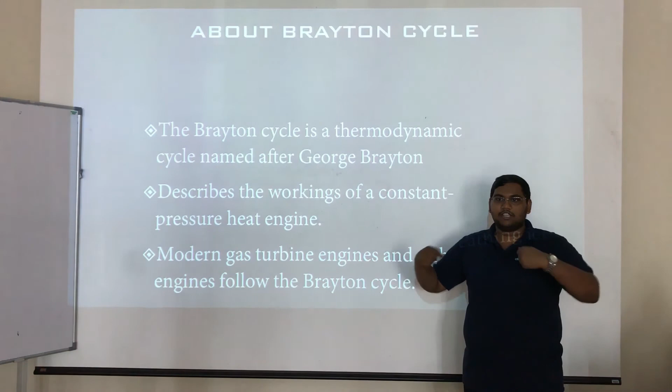So about the Brayton cycle. The Brayton cycle is a thermodynamic cycle named after George Brayton, so the Brayton cycle's name comes after his name. It describes the workings of a constant pressure heat engine, and modern gas turbine engines and air-breathing jet engines follow the Brayton cycle. Air-breathing jet means the air that is being drawn in for the sake of the engine's propulsion.

This solar Brayton cycle seems to be a bit interesting because the heat is absorbed from the sunlight itself, and from there the Brayton cycle can be applied for this application. So this is the Brayton cycle. I'll be touching into the closed Brayton cycle so it's easier for us to understand even more.

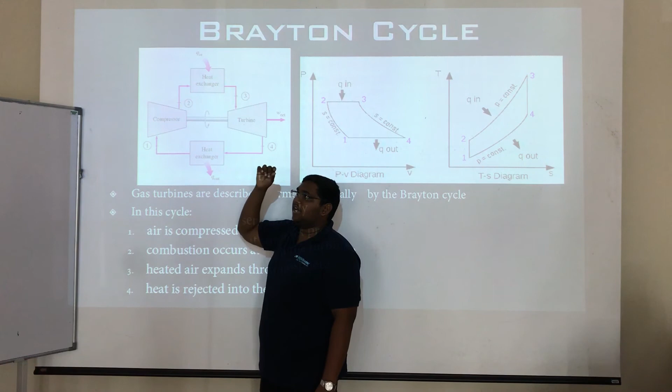So gas turbines are described thermodynamically by the Brayton cycle. In this cycle, what we know is the air is compressed inside a compressor and drawn into the heat exchanger where heat is pumped in, and the whole gas is flowed inside the turbine, and it is drawn into the heat exchanger for heat rejection.

And we can see over here there are two tables, and I will be focusing more on the TS diagram, so it is easier for us to understand even more. So over here we can just see the comparison between the schematic diagram and the TS diagram.

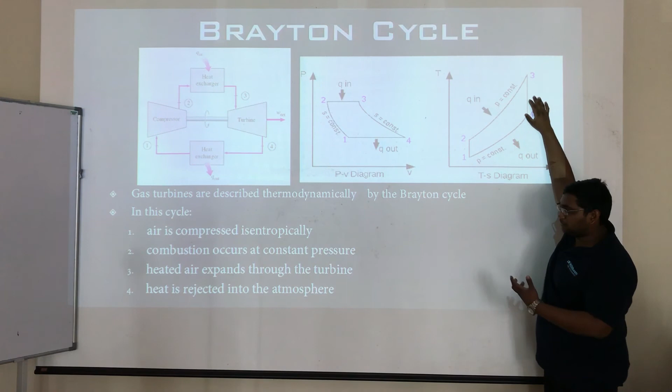So number one seems to be the compressor, where the pressure increases, and it is drawn into the heat exchanger, and combustion occurs at a constant pressure. Over here in this region, in the turbine, the air expands, and heat rejection occurs again.

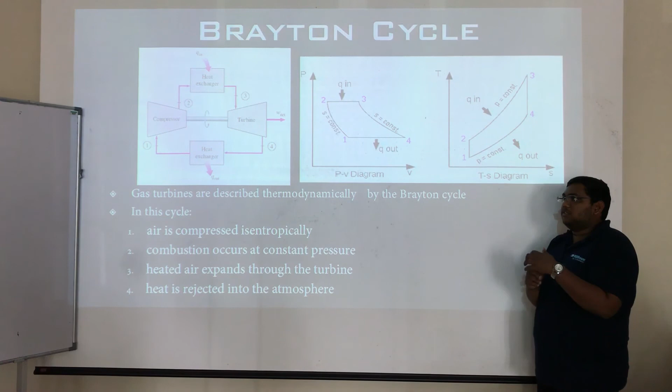And this is considered a continuous cycle, and it is considered to be much more sufficient and efficient enough to support and give a valid reason for us.

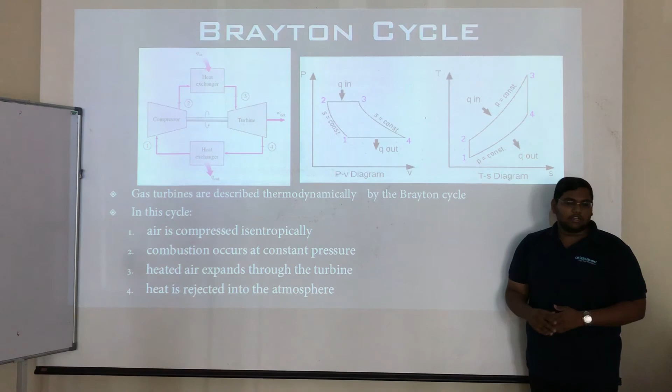The reason I'm talking about the gas turbine engine is because gas turbines use the Brayton cycle. So the Brayton cycle gives a valid proof for the usage of gas turbines in a lot of applications.

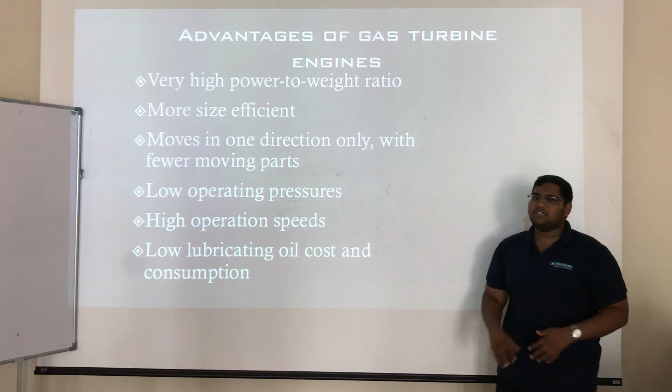So these are the disadvantages, but we have to choose these gas turbines according to our applications, because there are advantages and disadvantages to consider.

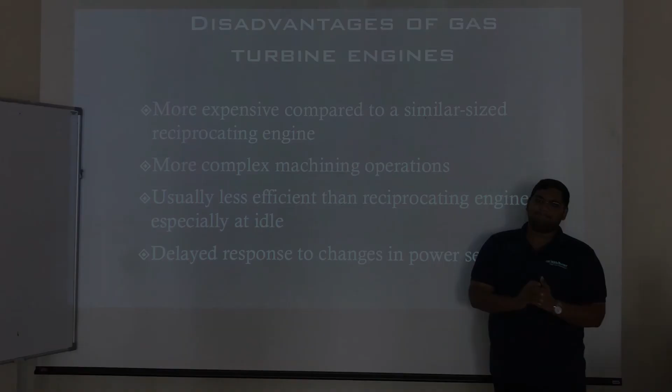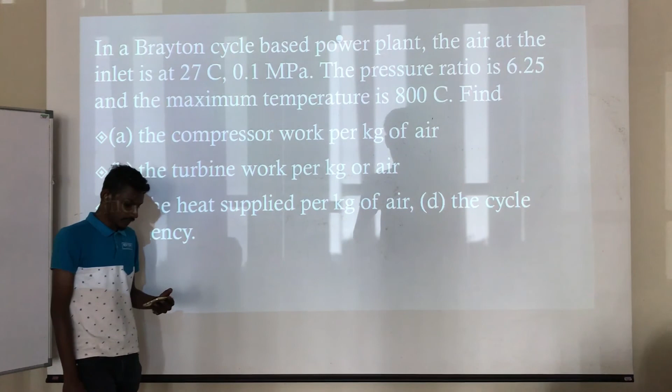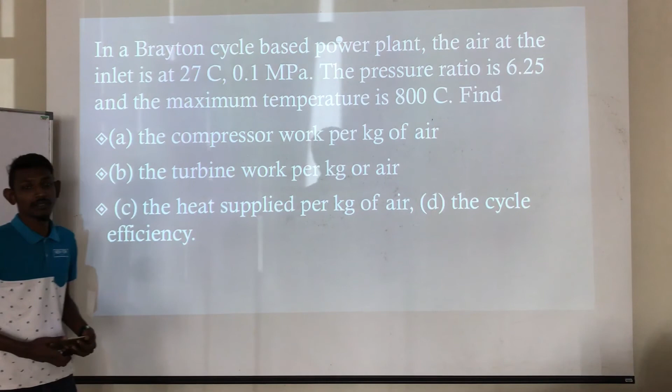Good morning, my name is Rubindren and I'm going to explain another problem that we are going to solve for today: in a Brayton cycle based power plant, the air at the inlet is at 27 degrees Celsius, 0.1 MPa. The pressure ratio is 6.25 and the maximum temperature is 800 degrees Celsius. What we are going to find for today is the compressor work per kilogram of air, the turbine work per kilogram of air, the heat supplied per kilogram of air, and also the cycle efficiency.

Okay, first from the question we know that temperature T1 is 27 degrees Celsius and also P1 is 0.1 MPa, the pressure ratio is 6.25, and also the T maximum is 800 degrees Celsius.

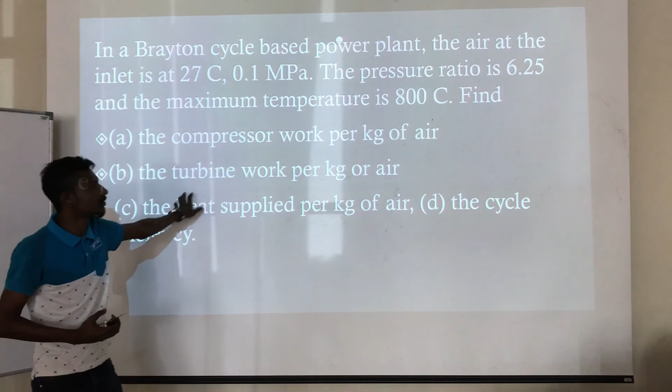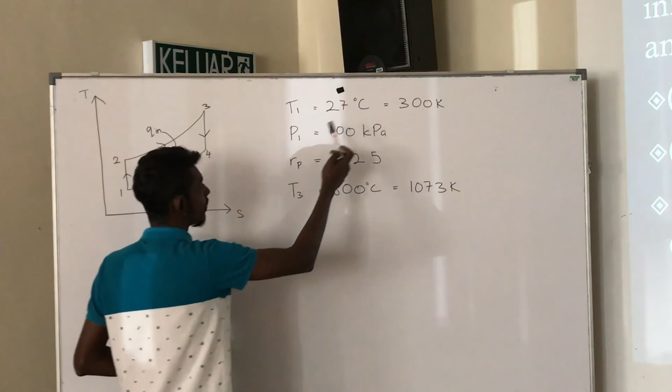As from the details we have collected from the question, I have listed out where the temperature is already converted to Kelvin, and also P1 and T3. This is the TS diagram for the question, and now I'm going to solve for the first process.

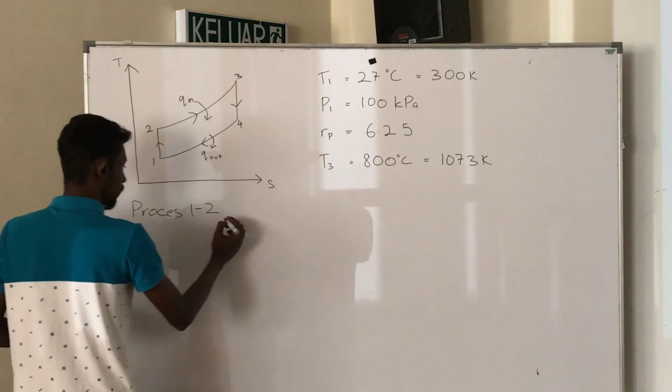The process is isentropic. T2 over T1 is equal to...

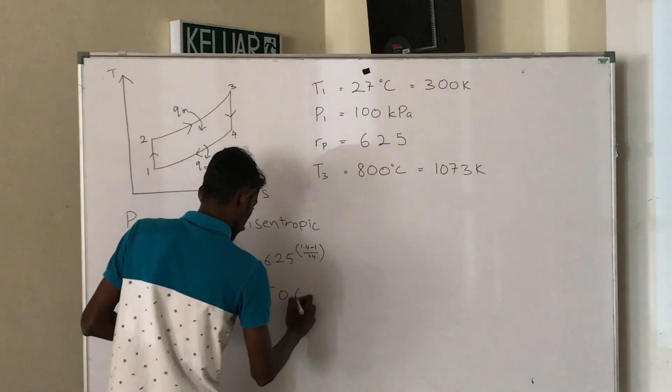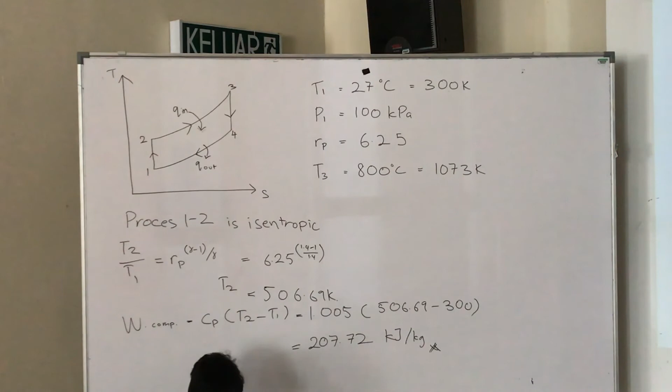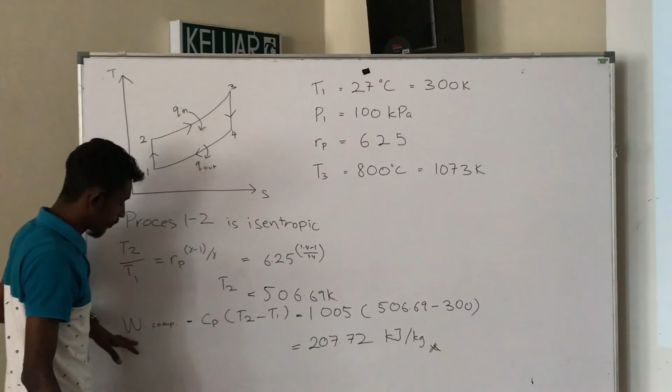Compressor. As we know that 1.4 is the constant value for the air, and once we have solved it, we can get the value of T2. For the work of the compressor, we use the formula where constant pressure times T2 minus T1, and this is a constant value for air. Once we have solved it, we can get 207.72 kilojoule per kilogram for the compressor work per kilogram of air.

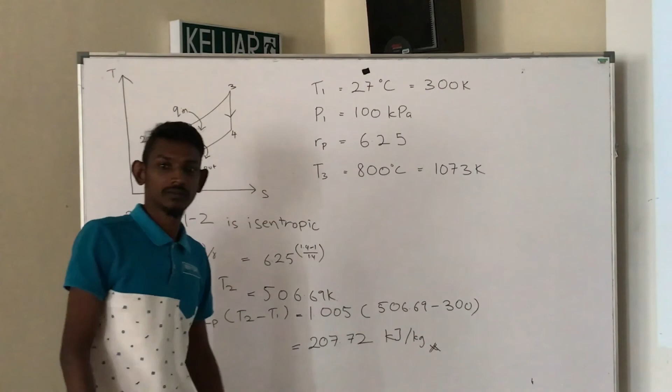Going to the next topic. So the next question is the turbine work per kilogram of air. Same thing what we do for compressor work. To find the turbine work, the formula is Cp and T. So the turbine is here: T3 minus T4. In order to find T4, we need to use the pressure ratio.

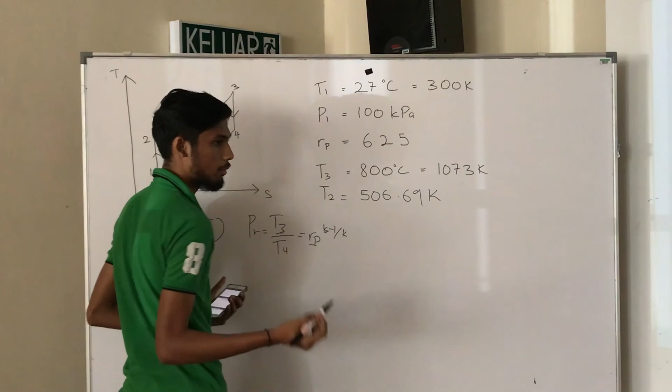So the pressure ratio is T3 over T4, which is equal to Rp to the power of K minus 1 over K. We already know T3, the Rp which is 6.25, and K is constant which we can get from the property table, and we will get T4.

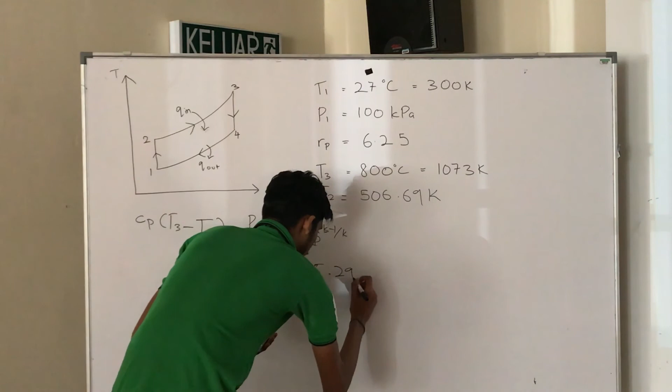So T4 is equal to 635.29 K. After we get this value, we just substitute it into T4.

So Cp is the specific constant, we can get it from table A2. So Cp is 1.005, T3 is 1073 minus 635.29, which equals 439.89 kilojoule per kg. Now we'll go for the heat supplied per kg of air.

The heat supplied is the Q in, which is from the second point to the third point. It's the same thing we do for the work done for the turbine and compressor, but now we want to find Q in. So Q in is equal to Cp, which is 1.005, times T3 minus T2.

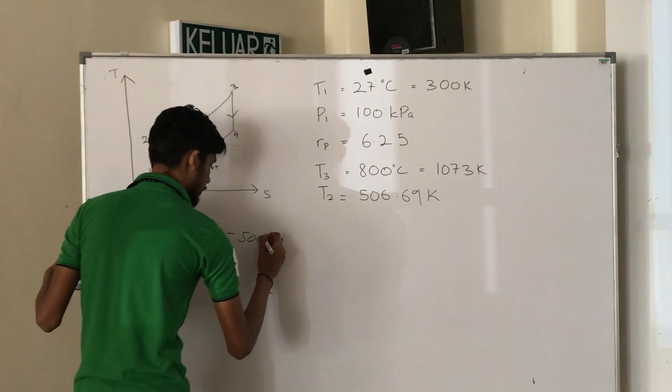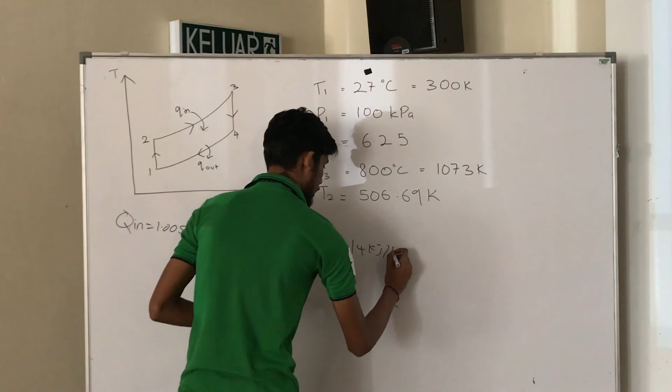1073 minus 506.69 equals 569.14 kilojoule per kg.

Okay, the next is the cycle efficiency. We know the cycle efficiency is eta, which is equal to W net over Q in. W net is the work of the turbine minus the work of the compressor, over Q in.

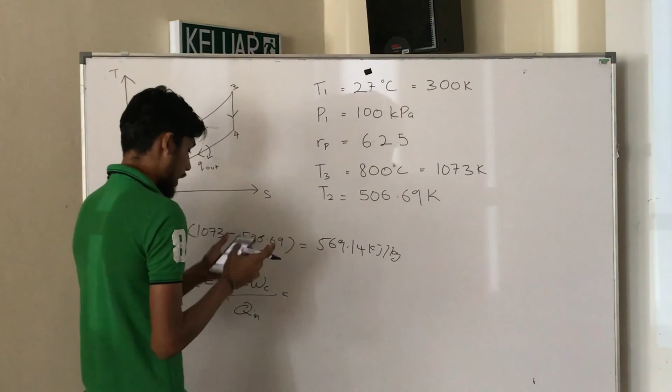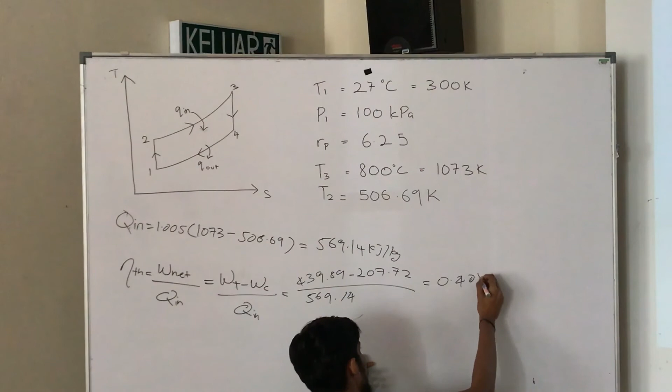We already solved for the turbine and compressor, so we just need to substitute the values and we will get the cycle efficiency. The work of turbine is 439.89 minus 207.72, divided by Q in which is 569.14. We will get the value 0.408, and in percentage we must times by 100, so we will get 40.8%.

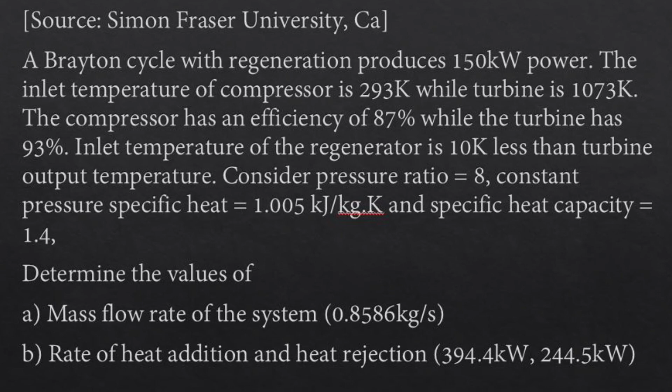Guys, my name is Yuen and I will be teaching you a tutorial on how to solve a problem, a Brayton cycle with regeneration. We extracted this problem from one of the universities and tried to solve it. We can see that this is a Brayton cycle, and it's not stated as ideal, so we can be sure there will be isentropic efficiencies in the compressor and turbine.

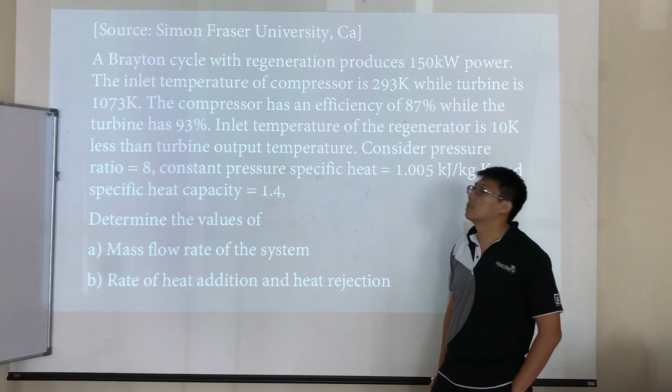This cycle produces 150 kilowatt, so the W net rate is 150 kilojoule per second. It's stated the inlet temperature of the compressor is 293 Kelvin, while the turbine is 1073 Kelvin. So T1 is 293 Kelvin, while T3 is 1073 Kelvin.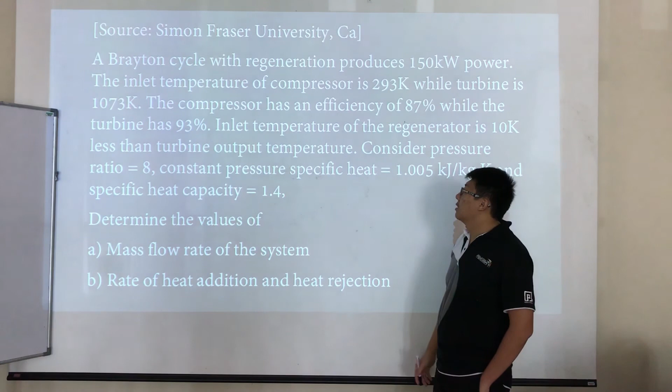Compressor has efficiency of 0.87, while the turbine has 93%, meaning 0.93. Inlet temperature of regeneration is 10 Kelvin less than the turbine output temperature. This information will be required when we try to answer the temperature for the regeneration input and output. Consider pressure ratio 8, RP is equal to 8. Constant pressure specific heat Cp is 1.005 kilojoule per kg Kelvin, and the specific capacity coefficient K is 1.4.

So let's start, and the question asks us to determine the mass flow rate of the system, M dot, and the rate of heat addition and heat rejection, Q in dot and Q out dot. So let's start.

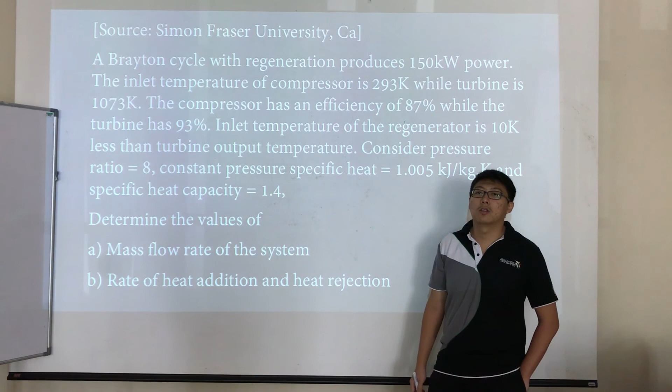Okay, so as you can see, the graph is already drawn on the board, and also the vital information has been extracted. We know the regenerator input is 10 Kelvin less than turbine output. Turbine output is point number 4, regenerator input is point 5, and the shaded area here signifies the regenerated heat, the regen heat.

So firstly, we have to get the information for all the points. We know this information, and we have the formula. So we are going to try to solve for T2S.

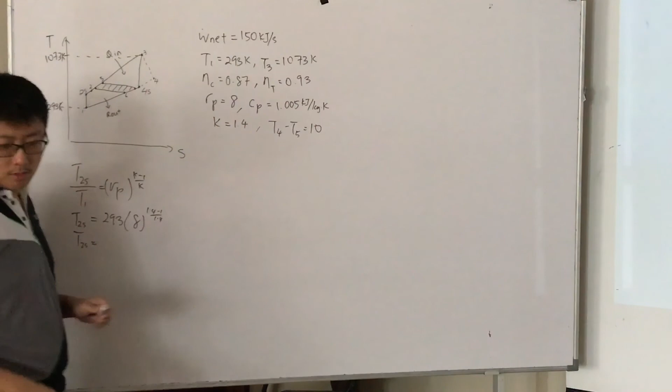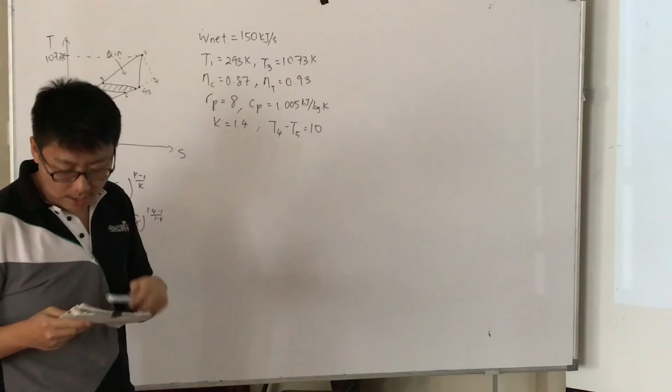T2S over T1 equals to RP to the power of K minus 1 over K. So T2S is 293 times 8 to the power of 1.4 minus 1 over 1.4. So T2S is 530.75.

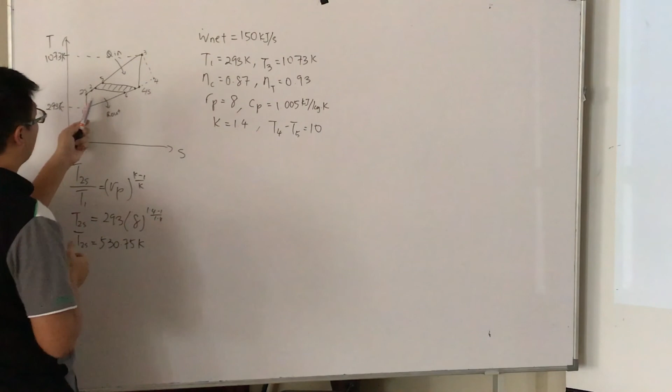Then from T2S we can get T2. The formula is, efficiency for compressor is T2S minus T1 over T2 minus T1. We have this, we have this, we have this, and we want to find T2. So T2 equals to 566.27.

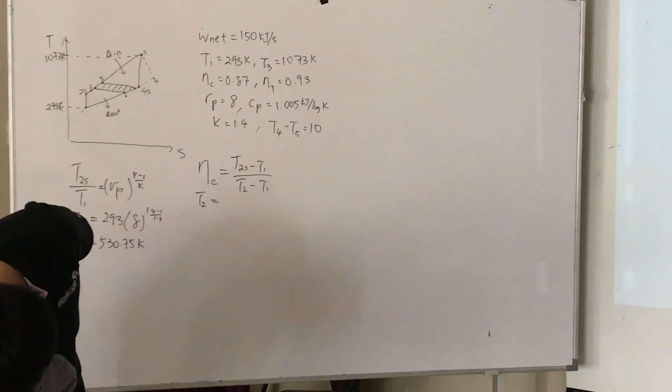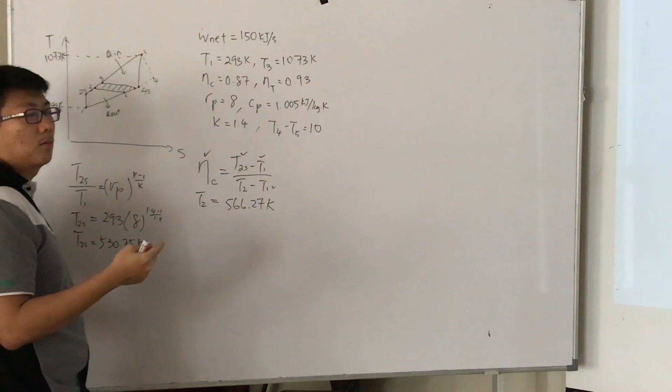Okay, we have this, we have this, we have this. So for the next few parts, I will skip the calculation, because I'll tell you which information we have, and you can do the calculation yourself.

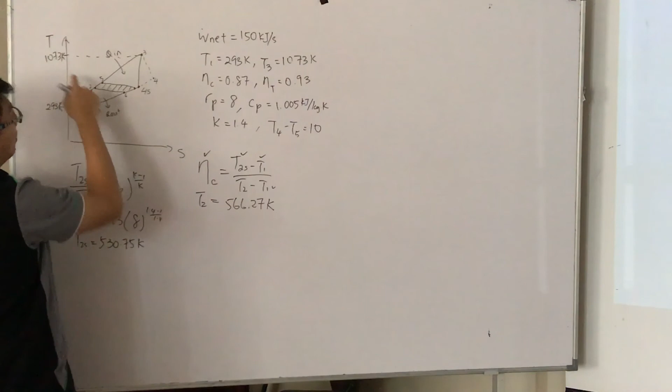So next we have T2 ready. Now we want to find T3. We know T3 is 1073K, so we get that from the graph already. Now we want to find T4S.

It's the same, T4S. T3 over T4S is actually 8, which is the RP, to the power of K minus 1 over K. So we want to find T4S, we have T3, T4S equals to 1073 over 8 to the power of 1.4 minus 1 over 1.4. And we know T4S is 592.34.

Okay, we have T4S. Now we want to find T4. It's the same like this, we use the isentropic efficiency to solve. The efficiency for turbine is T3 minus T4 over T3 minus T4S. We have this, which is 0.93.

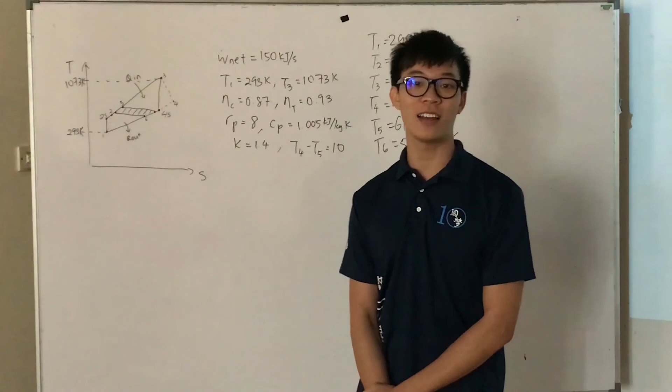So today I am going to explain the next two questions, which is the mass flow rate and also the heat addition and heat rejection. So the first thing we have to find out is the mass flow rate, because after all this calculation, we have to find out the work of the turbine and the work of the compressor. How will we solve this question? Actually this question is very easy. We just follow the formula, the constants, and then turbine is over here, 3 to 4, so it's T3 minus T4.

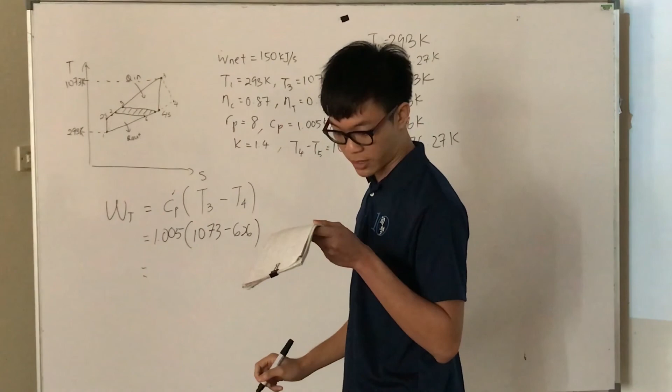So I directly put the answer because we have a lot of the points over here. We have CP, which is constant, 1.005, from the table, and T3 is over here, T4 is over here. So I just write down the things: 1.005, and then T3 we got 1073, and then T4 is 626. So finally, we can get the answer is 449.24 kilojoule per kg.

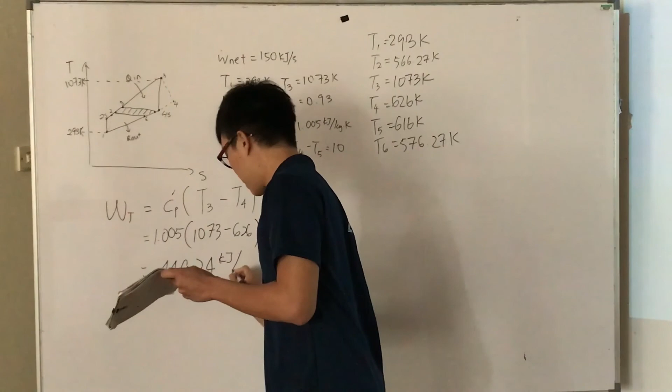So as we can see, we can get the work for turbine, and then afterwards we will move on to work of compressor. So the part over here is turbine, so the part over here is compressor. So we get to know that compressor is over here, so it's T2 minus T1.

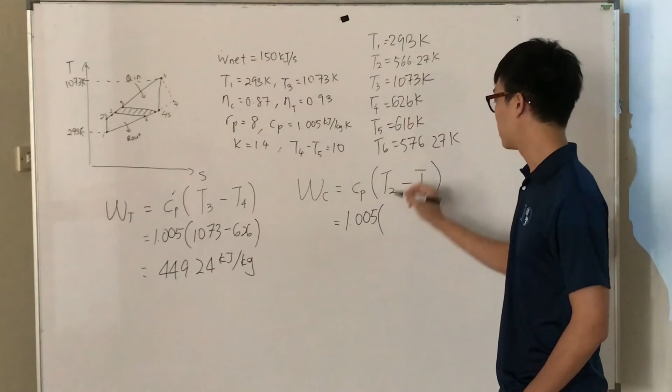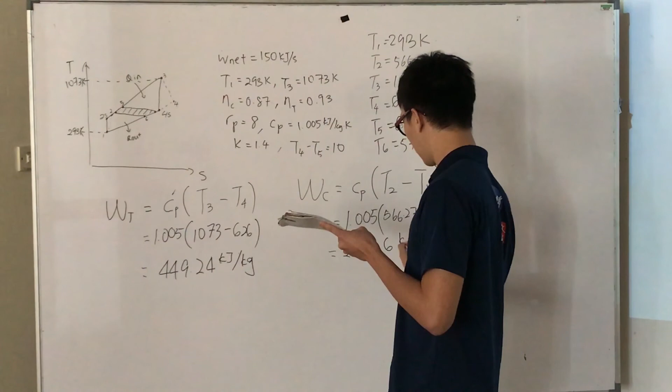The similar thing, we get for the constants, the CP is from the table also, which is 1.005, and then T2 is 566.27 minus 293. So we get the answer, after we solve the question, is 274.6 kilojoule per kg.

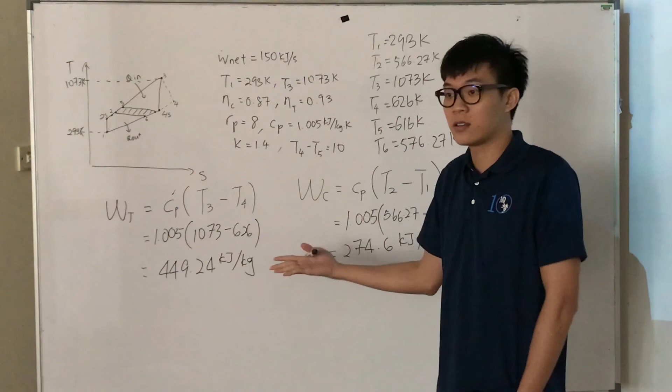So as we get the work of turbine and the work of compressor, what should we do now is take the work net output. The formula for work net output is work of turbine minus work of compressor. So you take this one minus this one, then you can get work of net. So the work of net we finally get is 174.64.

Okay, so can you get it? If you can't get it, just refer back to the previous video. Okay, so now we have the work net.

So now we have to find out what is the mass flow rate. Actually we have the W dot net over here, the rate of work, and we have the work output over here. So it's actually very easy to solve this question, you get the formula from the slide. The formula is: the rate of net work is equal to mass flow rate times the work output. So how you're going to find this is just your rate of net work divided by this.

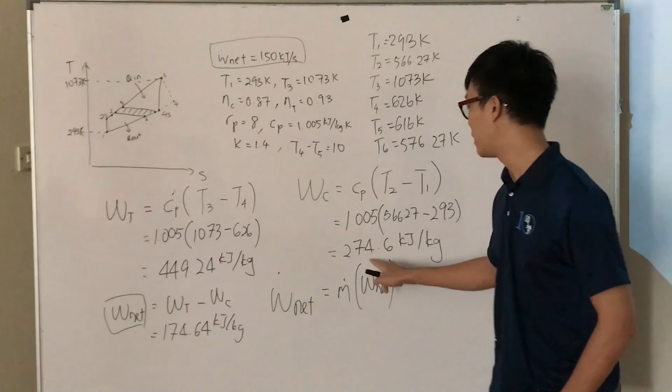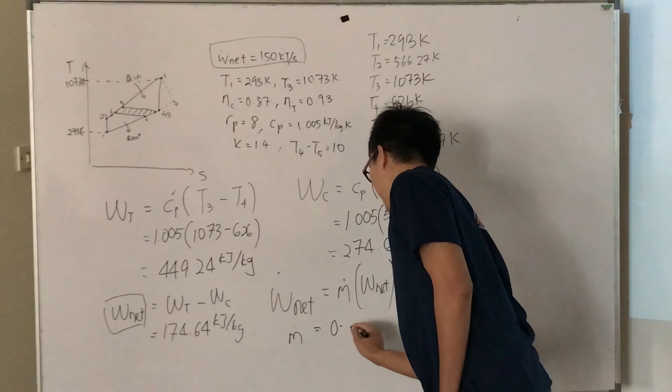So you can get the mass flow rate is equal to 0.86 kilogram per second. So this is the answer for mass flow rate.

So next, I'm going to explain about the heat rejection and heat addition. I'm going to rub this off. Have you taken note of this? Okay.

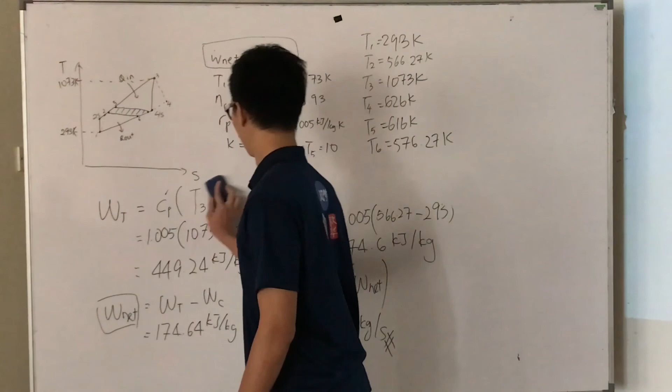So now we have to find out the heat rejection and heat addition. As we can see in the graph, Q in represents heat addition, and Q out represents heat rejection.

Okay, so how do we solve this question? Q in, this one is heat addition. How are we going to solve this? We have to find out the constant also. And then from this, we just take T3, the temperature of 3, and 5, minus 5.

So we just always refer to the graph. So we write down the answer, specific heat constant is 1.005. And then what's T3? 1073 minus 616. So what do we get? 459.29 kilojoule per kilogram. Is it correct?

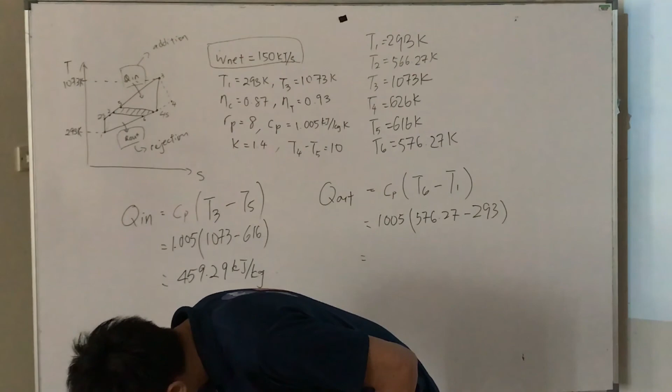Same thing, constant specific heat is 1.005. T6 is 576.27 minus 293. So what should we get finally? The answer is 284.69 kilojoule per kilogram.

So that's all from this question. I'm going to invite my friend to explain the next question, maybe in more detail.

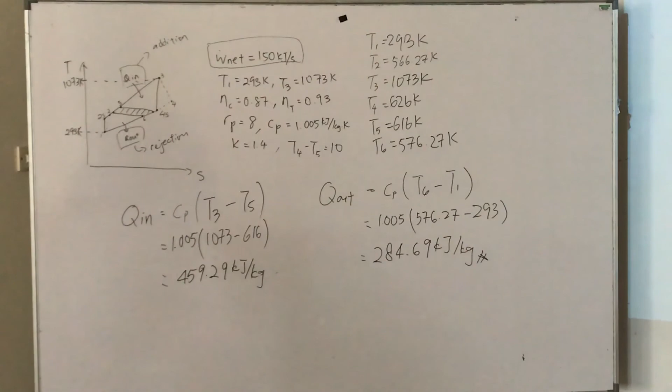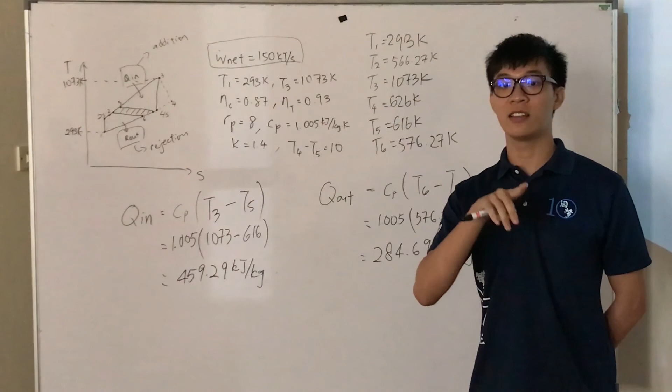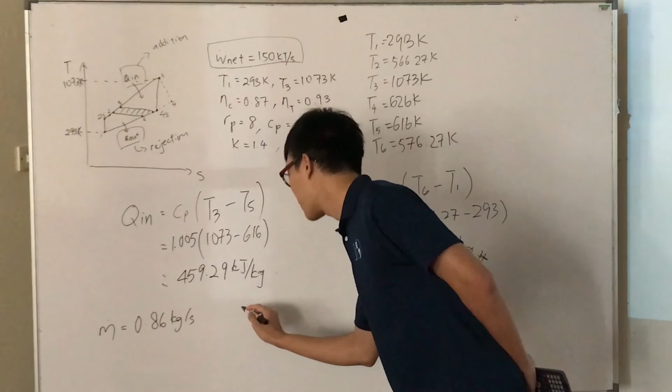Thanks. So I'm sorry for that. For Q in, actually Q in is the heat addition and Q out is the heat rejection. But the question asks for the rate of heat addition and heat rejection. So we have to add on the mass flow rate, which we found just now is 0.86 kilogram per second. So how to find out the rate of heat addition and heat rejection is: heat addition, Q dot in, is actually equal to M dot times Q in, the heat addition.

So what we can get here is, I'm calculating, 394.99.

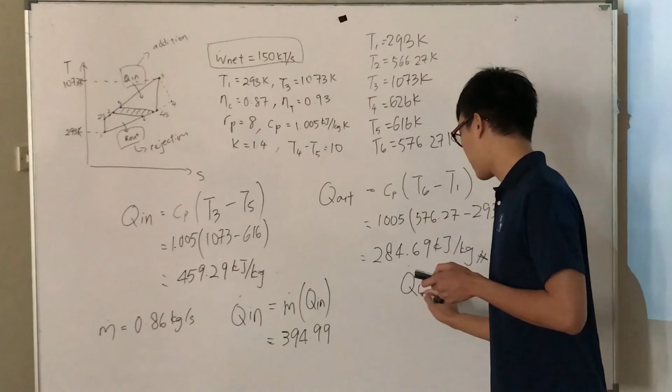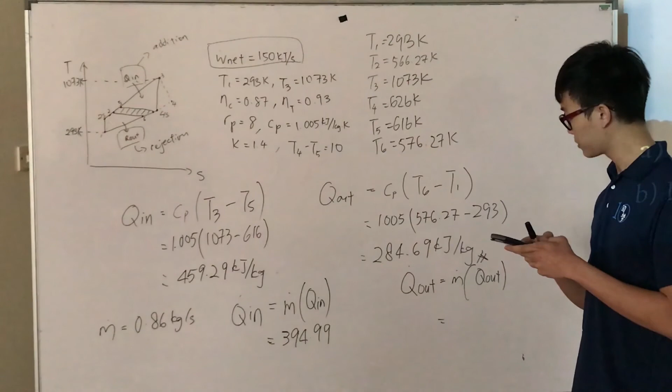And then for the Q dot out, the rate of heat rejection, is equal to mass flow rate times the heat rejection. So what we can get is 244.83.

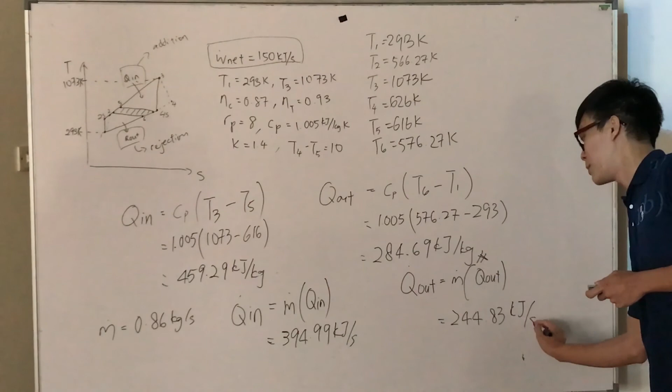So actually, this one is not yet finished because I haven't put in the units. So what's the units? Kilojoule per second. So don't forget the units, or you will lose marks. So that's all from me. Thank you.